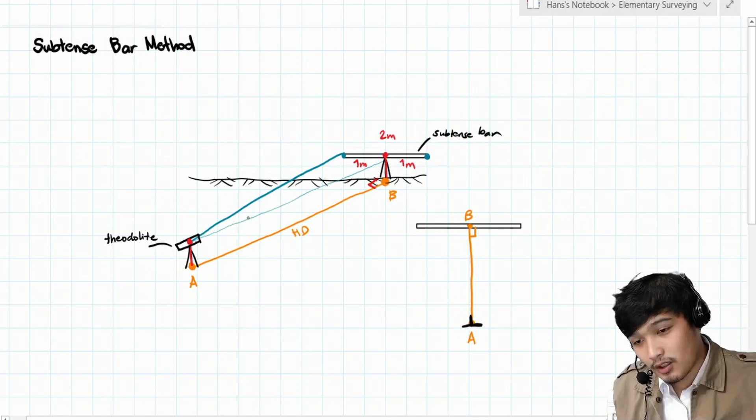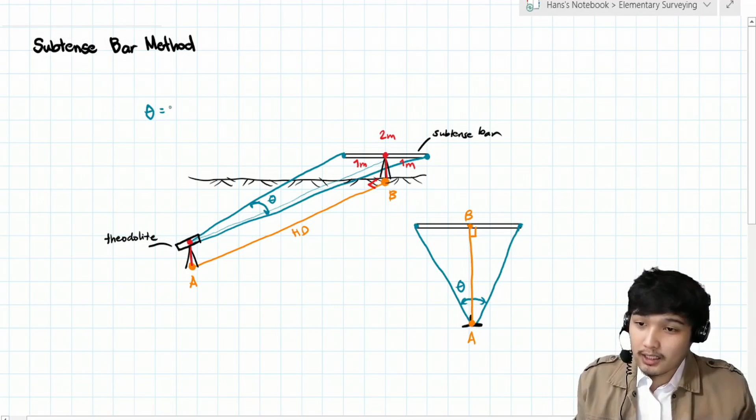We sight it from our instrument, then we get the subtended angle, which is this. Take note that the angle we measure in this method is always a horizontal angle. Always a horizontal angle. So this side is 1 meter.

This side is also 1 meter. Our aim is to measure the horizontal distance between points A and B. Using basic trigonometric functions, we can get the HD. Consider half of the triangle, let's say the right side. By the tangent function, if theta is the whole angle, then this half must be theta over 2.

So by tangent of theta over 2, that is opposite over adjacent, which equals 1 meter over the horizontal distance. Therefore, the formula for the horizontal distance equals 1 meter over the tangent of theta over 2. It's that simple, we can directly solve for the horizontal distance.

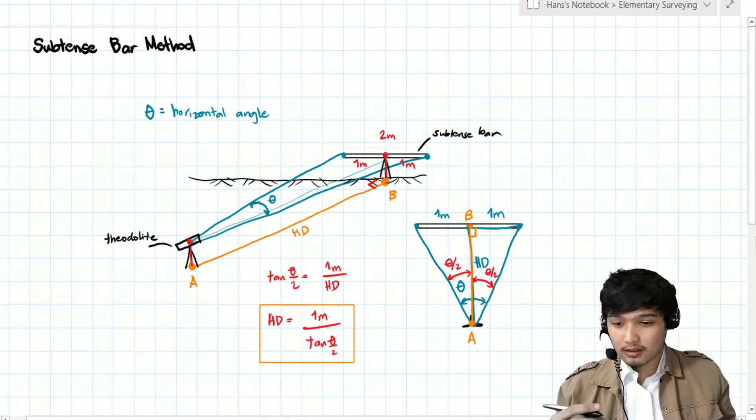Let me show an example. Let's say points A and B do not lie along the same horizontal plane, so there's a difference in elevation. But our aim is still to get the horizontal distance HD. What we do is the same: set up the instrument at point A, and the subtense bar at point B. The requirement is still the same, this must be 90 degrees.

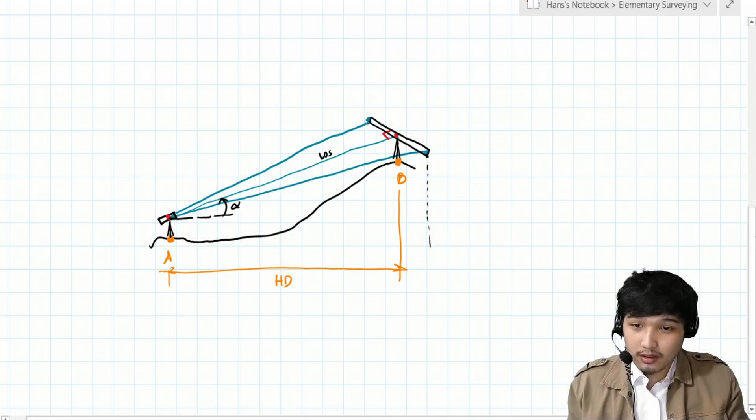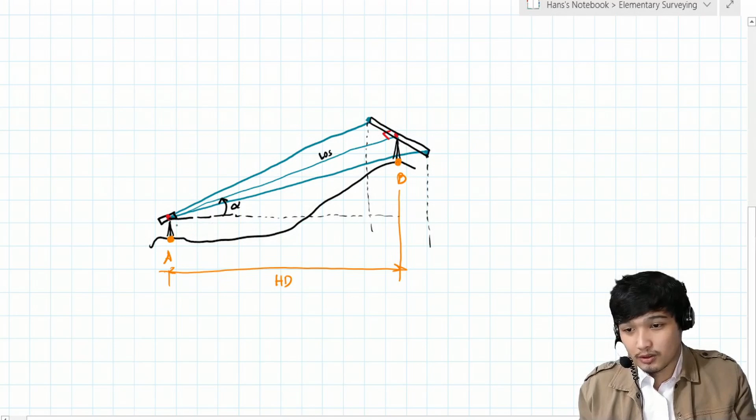Ang ma-measure natin class na subtended angle ay yung horizontal, hindi yung inclined. So ang gagawin natin, i-project natin ito downward, at i-project din natin tong horizontal line na to. Yun dito yung ma-measure niya, saka yung parang imaginary 2 meters dito. So that is yung angle theta.

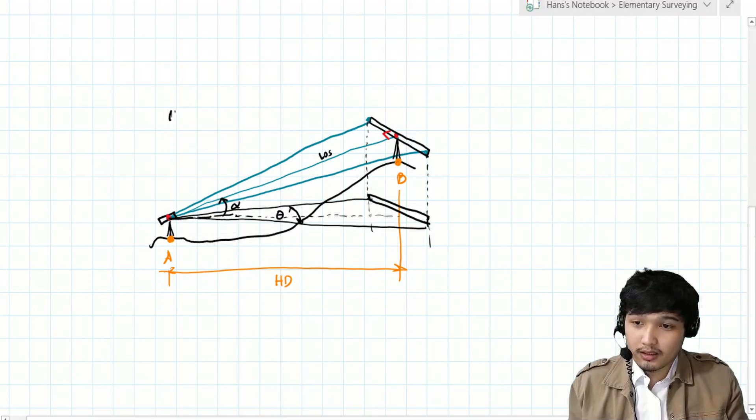Therefore class, for an inclined line of sight, yung formula natin na HD is equal sa 1 meter over tangent of theta over 2 ay hindi na natin siya i-revise. So yun lang class. I think we're ready to solve na sample problems regarding this one.

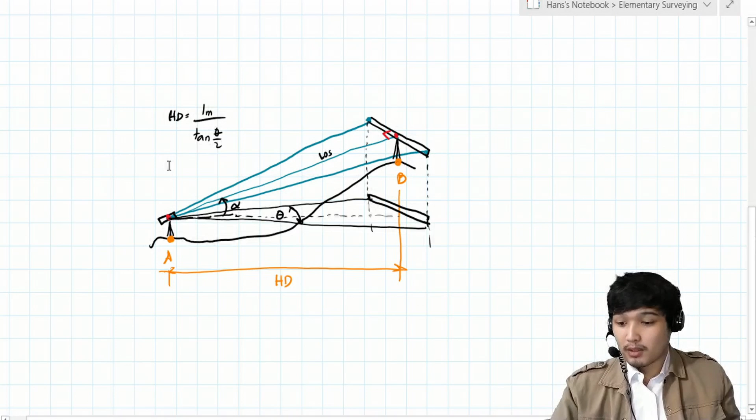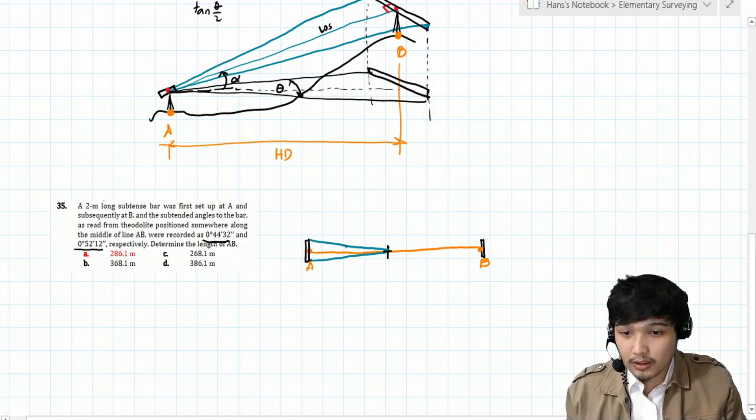Dito niya nilagay yung unang subtense bar, at dito sa kabila yung isa. Nag-measure siya ng subtended angle. Ilan daw ito class? Yung theta A ay 0 degree 44 minutes 32 seconds. At nung nag-sight naman siya dun sa subtense bar at B, yung theta B equals 52 minutes at 12 seconds.

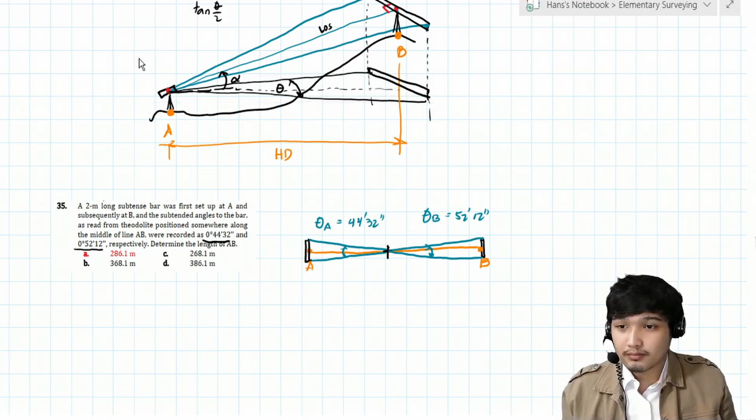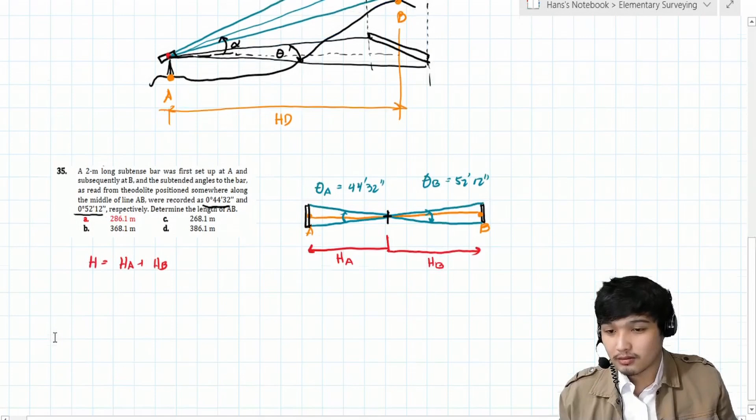Therefore class, may dalawa tayong distance na masasolve dito: yung distance ng instrument to A, so HA, at from the instrument to B, so HB. Therefore, yung total horizontal distance equals sa HA plus HB. Okay, solve lang natin sila individually.

Yung HA equal sa 1 meter over yung tangent ng theta over 2. Yung theta A is 0 degree 44 minutes 32 seconds divided by 2. Plus HB, so 1 meter over yung tangent theta B over 2, kung saan theta B is 0 degree 52 minutes 12 seconds divided by 2. So with that, masolve na natin yung horizontal distance between A and B.

Sagot sa calculator ko class ay 286.09957, so that is 286.1 meters. So that's letter A. Sana gets class. Let's proceed sa next problem.

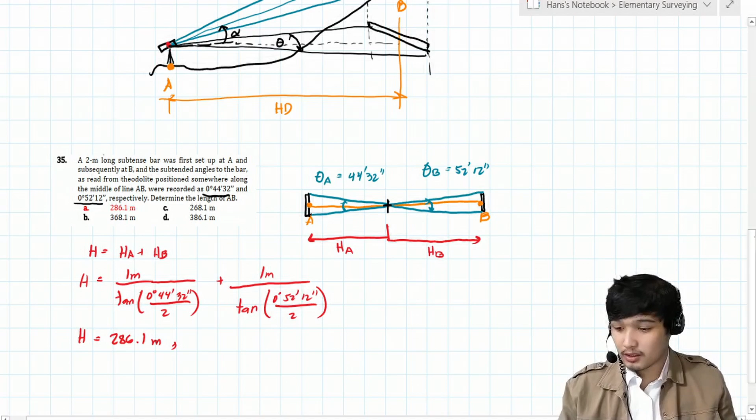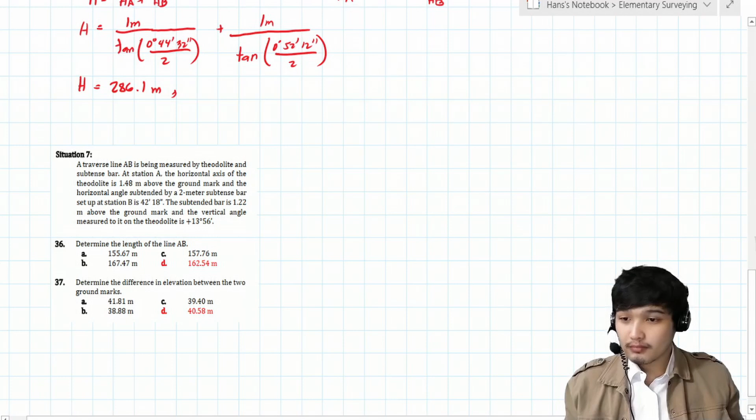Okay situation number 7. Basahin natin class. Traverse line AB is being measured by theodolite and subtense bar. At station A, the horizontal axis of the theodolite is 1.48 meters above the ground mark, and the horizontal angle subtended by a 2 meter subtense bar set up at station B is 42 minutes 18 seconds. So the subtense bar is 1.22 meters above the ground mark, and the vertical angle measured to it on the theodolite is positive 13 degree 56 minutes.

Tinatanong is determine the length of line AB, which is yung horizontal distance between A and B. And then next is determine the difference in elevation between the two ground marks.

Ang setup, nasa point A ang theodolite, at sa point B naman yung subtense bar. Sinabi dito class na yung vertical angle is positive 13 degrees 56 minutes. So possibly, ganito yung slope o yung difference in elevation between points A and B. Mas mababa si A, so mas mataas naman si B.

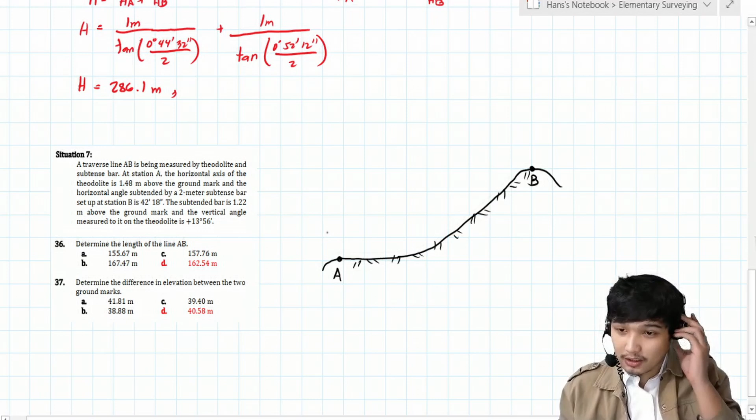Okay, so A and B. Let's read again: at station A, the horizontal axis of the theodolite is 1.48 meters above the ground mark. So this is the instrument, and this is the horizontal axis, which is 1.48 meters. Then it sighted the subtense bar at B, which also has a given height - the subtended bar is 1.22 meters above the ground mark. So this height is 1.22.

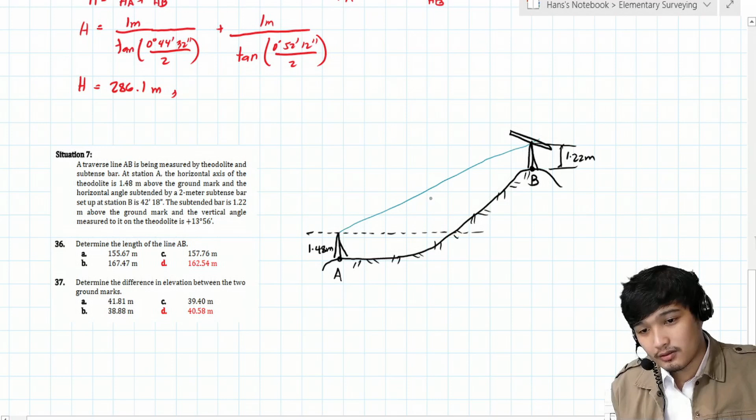So the line of sight from A to B is inclined, let's say like this. And then it sighted both ends. Guess what this angle or vertical angle is - that is positive, because it's going upward. So positive 13 degrees 56 minutes.

Given also, let me write this, the horizontal angle is 42 minutes and 18 seconds. So the first question is: what is the horizontal distance between A and B? For that, we can solve it directly using the formula HD equals 1 meter over tangent theta over 2. So let's plug in.

So what's the answer, class? So the answer is 162.54 meters. Okay, so that is letter D.

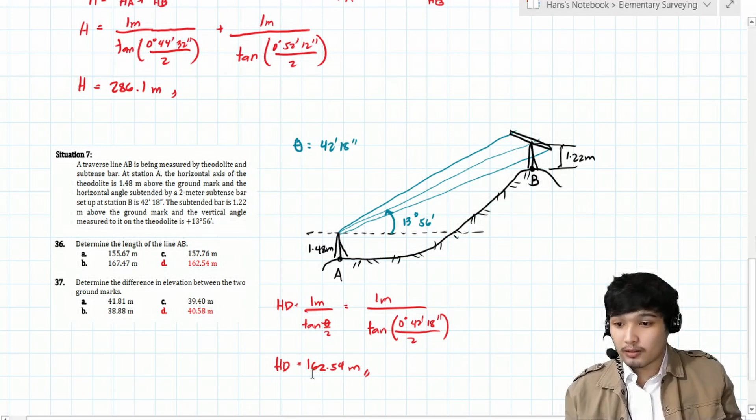So the next question is: determine the difference in elevation between the two ground marks. So what's being asked is the distance in elevation between points A and B. So here is A, and here is B. Let's denote the distance between the two points A and B as H. So what can we get from our setup?

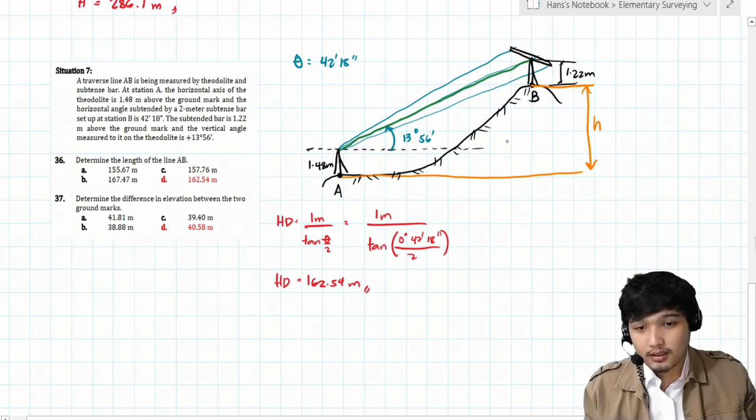If we consider this triangle, from the line of sight and from the horizontal axis, we can get this vertical distance, class. Right? Through simple trigonometric function, because this is already the horizontal distance. So to get this vertical distance, what is it, class? It would be tangent of 13 degrees 56 minutes.

So let's set up that tangent of 13 degrees 56 minutes equals opposite vertical distance over adjacent horizontal distance, which is 162.54 meters. So what is the corresponding vertical distance? That is 40.32 meters. Do you see it?

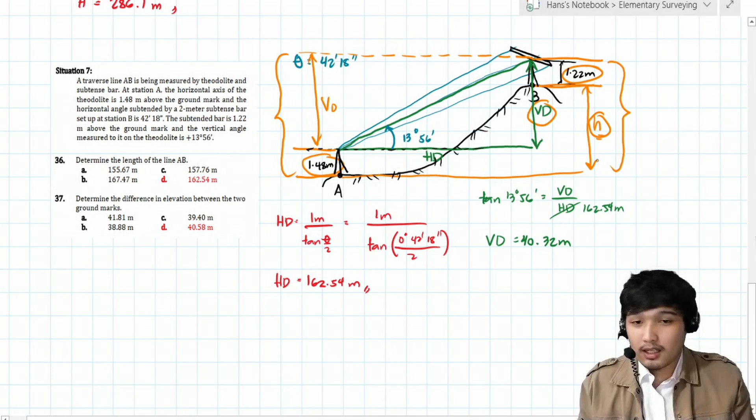If we try to project the subtense bar horizontally, is this distance the same as VD? Right, so it's the same as VD. So we can say that the total height on the left equals the total height on the right. So we can now provide a relationship: VD plus 1.48 equals 1.22 plus the difference in elevation H. So with VD solved as 40.32...

What is the equivalent height H, class? So the answer is 40.58 meters. So that is letter D.